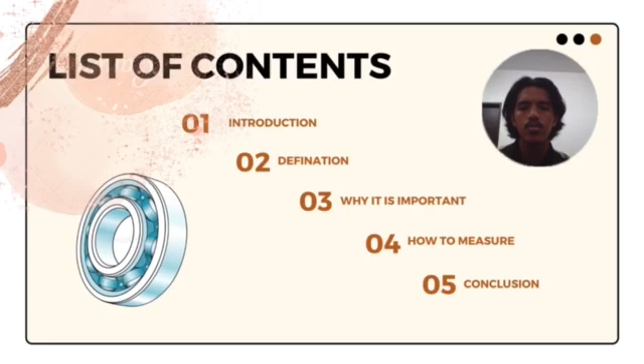Alright, for this video, we have 4 group members, which are Mama Haikal, Mama Amirul, Yasmin Tuhan, and lastly, Ikmal Hakim.

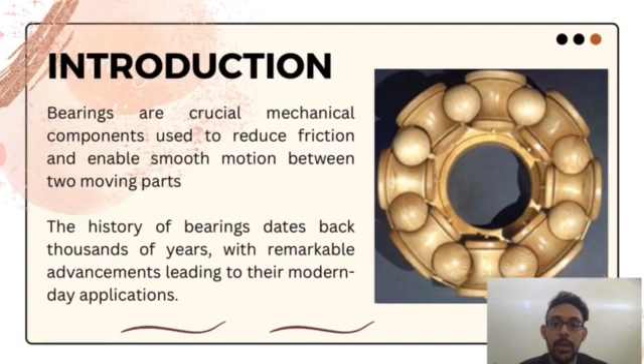Bearings are crucial mechanical components used to reduce friction and enable smooth motion between two moving parts. The history of bearings dates back thousands of years, with remarkable advancements leading to their modern-day applications. And next, we will take a look at the ancient origins of bearings.

So bearings can be traced back to ancient civilizations such as the Egyptians and Romans, who used wooden rollers to transport heavy objects. Ancient Egyptians also utilized lubricants like oil and animal fat to reduce friction and facilitate smoother movement.

During the Renaissance era, which is the 14th to 17th century, inventors like Leonardo da Vinci conceptualized various bearing designs, including ball bearings and needle bearings. These early designs paved the way for further developments in the field of mechanics.

During the Industrial Revolution era in the 18th century, that turn of the century marked a significant turning point in bearing technology. James Harrison is credited with inventing the first modern-style ball bearing in 1794, which played a pivotal role in revolutionizing machinery and transportation.

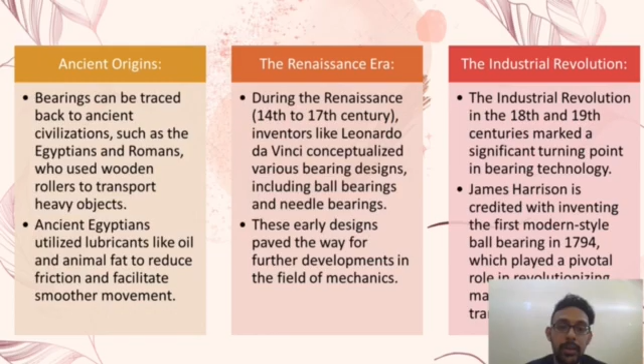Okay, so this part is the definition. So what is a bearing and how the bearing is defined. So basically, bearing is defined as a mechanical component that supports and controls the movement of parts in machines and equipment. The term bearing is derived from the verb to bear, meaning to support, carry, or endure.

Bearings manage the vectors of normal forces acting on moving parts, preventing undesired motion and maintaining stability. Reducing friction, providing support, and also controlling force. Bearings improve the stability, alignment, and overall performance of machines and equipment. The bearing also has two types. So first is free linear movement, and the second is free rotation around a fixed axis.

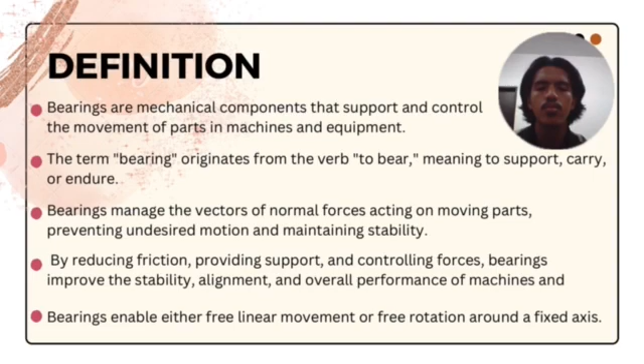Okay, so the first type of bearing, which is linear motion bearing. So this type is designed to facilitate smooth and controlled linear movement of components along a straight path. They are commonly applied where precise and frictionless linear motion is required.

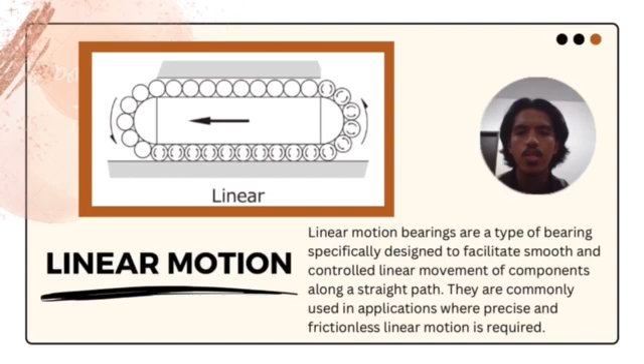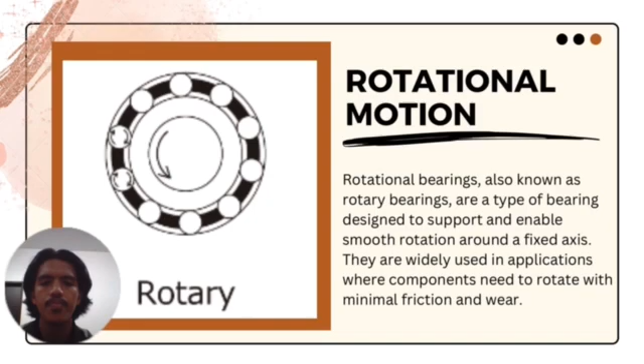So the second type of bearing is rotational motion. So this rotational bearing, also known as rotary bearing, is a type of bearing that is designed to support and enable smooth rotation around a fixed axis. They are widely used where components need to rotate with minimal friction and wear.

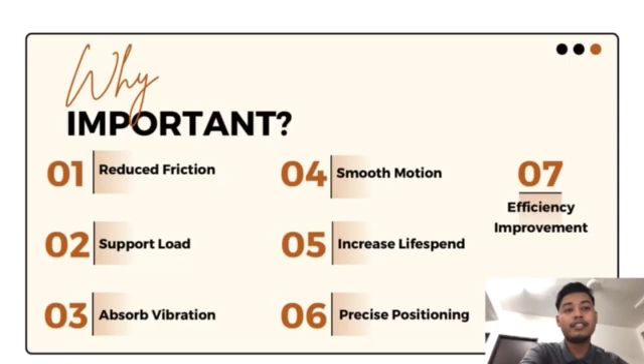Bearings allow for exact component placement, which is essential in situations where precision and alignment are required. Lastly, bearings also can improve efficiency by reducing power consumption and raising system performance. Bearings help to increase energy efficiency. And next, I will explain how to identify bearing defects.

First, we can use vibration analysis. Vibrations created during operation are monitored and analyzed using sensors positioned close to the bearing. Odd vibration patterns such as intensified vibration or odd frequency ranges may be a sign of a possible bearing problem. After that, we can use temperature monitoring. The bearing temperature is monitored to help identify any unusual temperature spikes. This may need attention since it may indicate issues like inadequate lubrication, high friction, and bearing damage.

After that, we also can use oil analysis. Bearing health may be determined by routine lubricating oil analysis to evaluate the bearing condition; impurities, excessive wear particles, or lubrication deterioration might be found. Lastly, we can use infrared thermography to detect temperature fluctuations on the bearing surface. Infrared cameras are employed. Hotspots or erratic temperature patterns may point to a variety of problems, including insufficient lubrication or misalignment.

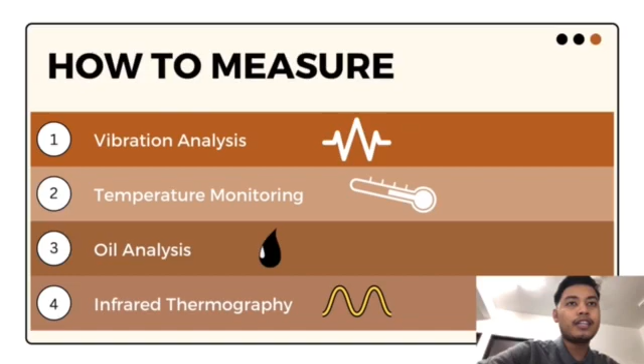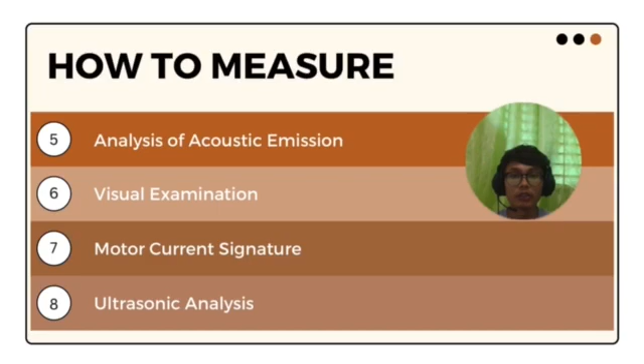For the conclusion, bearings are crucial mechanical components that have played a significant role in the advancement of machinery, transportation, and various industries. From their ancient origins to modern-day applications, the history of bearings shows us the innovations and progress of human engineering. As we know, the bearing's function is to reduce friction and enable smooth motion between two moving parts. Here are the important points about bearings that I have summarized.

Okay, first, bearings minimize friction between moving components. Number 2, bearings support and distribute weight and forces within a mechanical system. Number 3, bearings enable smooth rotation or movement of components. Number 4, by reducing friction and wear, bearings extend the life of mechanical systems, resulting in fewer repairs or replacements. Okay, number 5, bearings absorb shocks and dampen vibrations. It protects the system from damage and maintains performance.

Number 6, bearings allow for exact component placement. It is crucial for precision and alignment requirements. Lastly, bearings contribute to increased energy efficiency by reducing power consumption and enhancing system performance. To measure the condition of bearings and detect any defects or anomalies, various methods can be employed, including vibration analysis, temperature monitoring, acoustic emission analysis, oil analysis, infrared thermography, visual examination, motor current signature analysis, and also ultrasonic analysis.